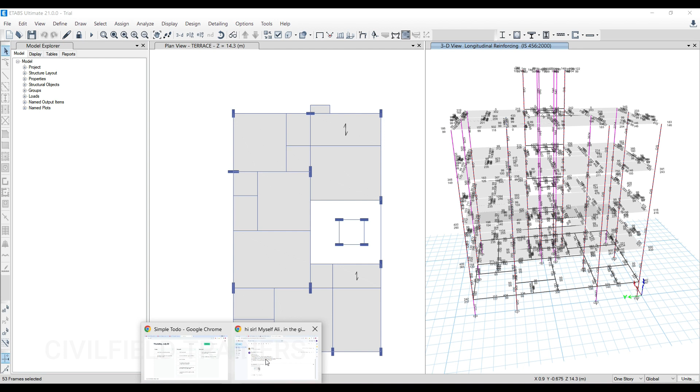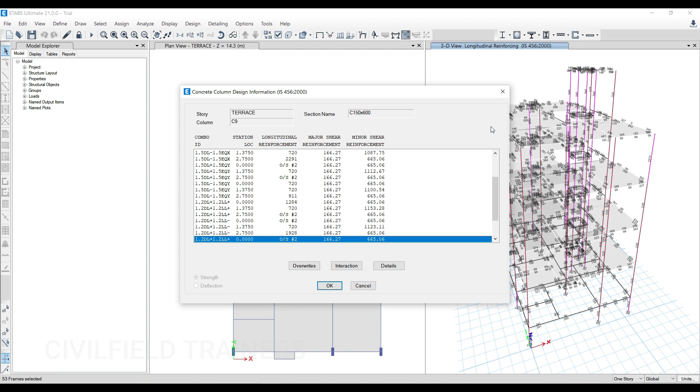We'll come to this part later, but let's come over here and see how we are going to solve this. The very first thing that you have to do anytime this kind of failure comes is to open this and see. So I'm seeing the topmost column, and you can see in the longitudinal reinforcement - see, in the shear part nothing is failing, in the minor shear nothing is failing, but in the longitudinal reinforcement you can see there are so many failures.

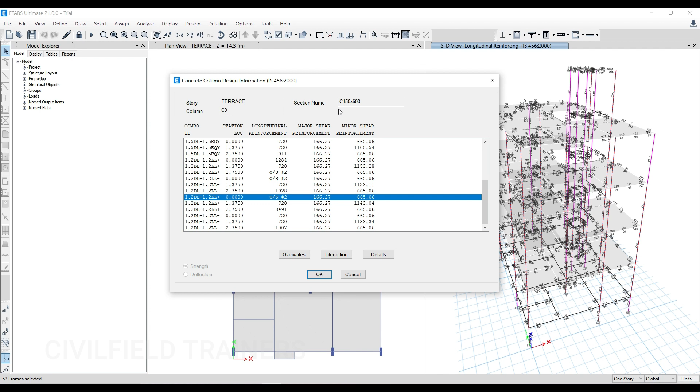Off the bat you can see two things. One, most of your failures are basically in earthquake conditions, that are failing a lot of stuff. And the second thing is the size of the column - it is only 150mm, it is 150mm thick and 600mm in length. So your question might be, sir, how can we just give a 150mm column, which is actually quite true.

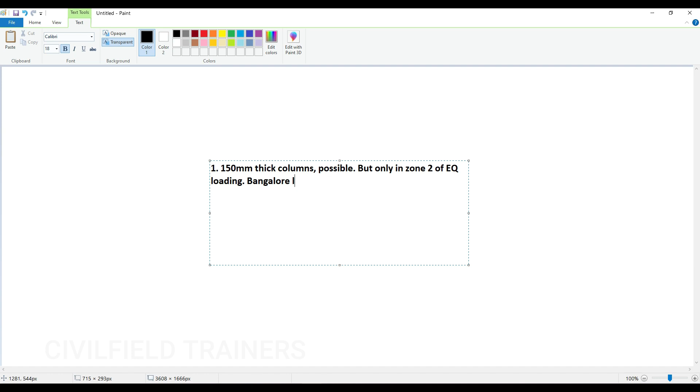So the very first thing that I'll do is unlock this model. Let us go to the paint for just a second. I'll just make a note so that even you can remember what we have covered so far. The very first thing is 150mm thick columns are possible, but only in zone 2 of earthquake loading - basically Bangalore like regions. If you go north, you cannot do this.

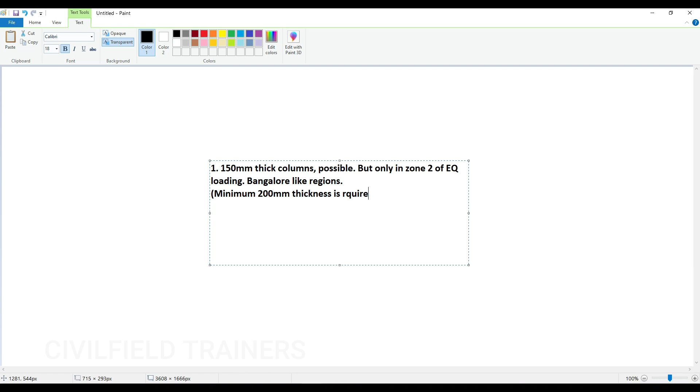Minimum 200mm thickness is always required. This is given to us by the code - if you open up IS 1893 you will get this. And this is the very first point that we have to discuss: 150mm thick columns are possible, but only in zone 2 of earthquake loading, where there is no earthquake basically. Bangalore like regions, minimum 200 thickness is required.

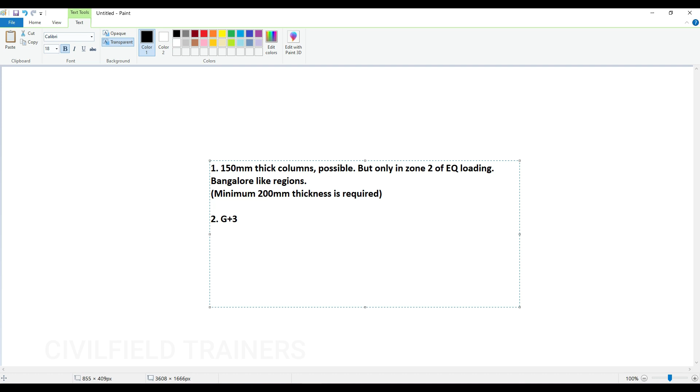The very first point. Second point is for G plus 2, G plus 3 projects - up to G plus 3 projects, no need of EQ loading. Why am I saying this? Because already Bangalore is in zone 2, and this building belongs to Bangalore basically. So it's already zone 2 and the height is just G plus 2 - I think G plus 2 or G plus 3 project it is. So there is no way of providing earthquake loading for such a small project. You're not going to get any kind of drastic changes because of EQ loading or wind load basically. So no lateral loads.

Okay, so let me just open this thing again.

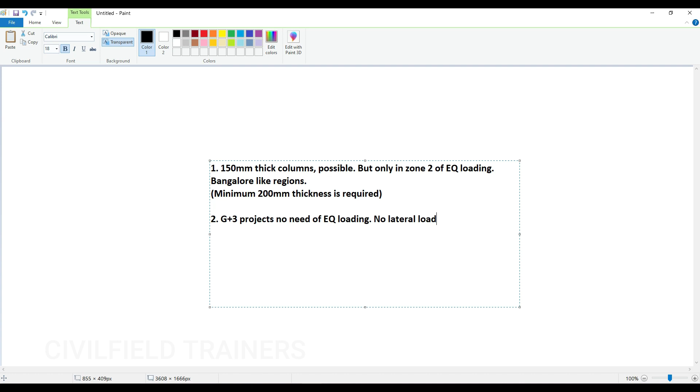We have to go to define, then load pattern. Let me check what we have done here. So we have got self weight, typical live load, roof live load, wall load, floor finish. We have EQX and EQY, but we don't need EQX and EQY, so let's just delete this load directly.

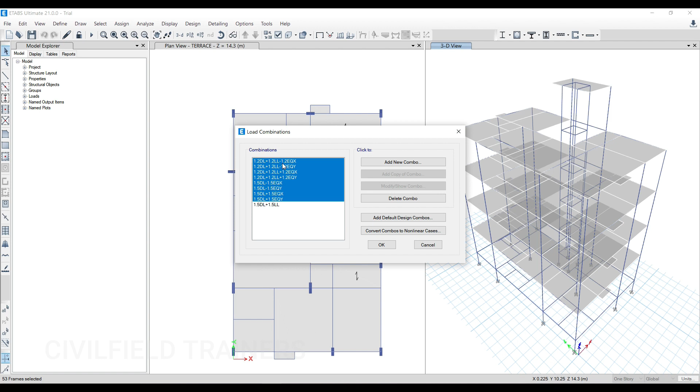Okay, I'll come to define and go to load combinations now, and let me see where is EQX and EQY. Okay, almost all of them have EQX and EQY, so let me just delete all these combos. Let me add a new combo here.

Let me make it a dead load plus live load combo, with self weight, typical live load, roof live load, wall load, and last but not least floor finish. Okay, 1 2 3 4 5.

So we create one combination like this, and let me check this one. You can see there's a mistake done here. It is 1.5, but floor finish has been applied 2 times - I think roof live load is missing here.

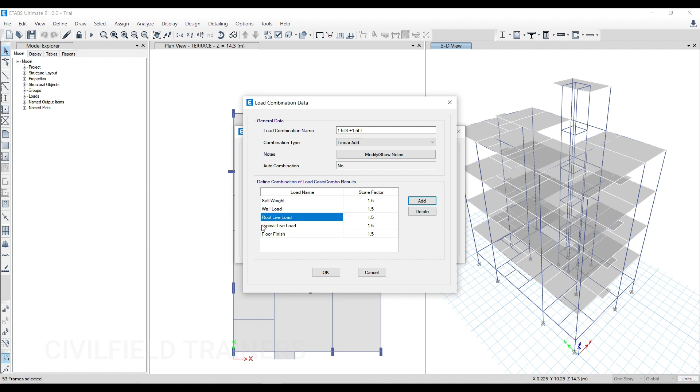Roof live load, okay, so you have to check this. All right, like this, so let me just open this up. G+3 project, no need of EQ loading. Third step would be: check your load pattern and your load combinations. It is very important, because we just got a mistake over there. So we have done this much.

Let us run the analysis again. We have to do this 4 to 5 times - an iteration process is required here. Only then can we tell if it is coming safe or not. Now because we have removed the EQ from the equation, a lot of the columns should be coming as safe right now.

Okay, let me check this. So I'll go here, verify members passed, and now half of them have become safe.

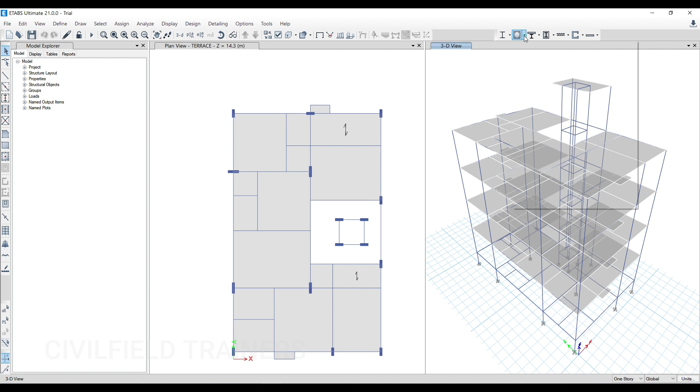One more thing I wanted to check: let me unlock the model for now. After unlocking the model, I'll go and click Control A - you can choose whichever window you want. Click Control A, go for this option, and click View/Revise Overwrites. See, right now the option is available - if I don't select anything, this option will not come to you. So Control A, select everything, then do View/Revise Overwrites.

Just mention this point also: the fourth step is select the complete model and go for View/Revise Overwrites. I think overwrites are a different thing. Overwrites, okay. So let me come back over here.

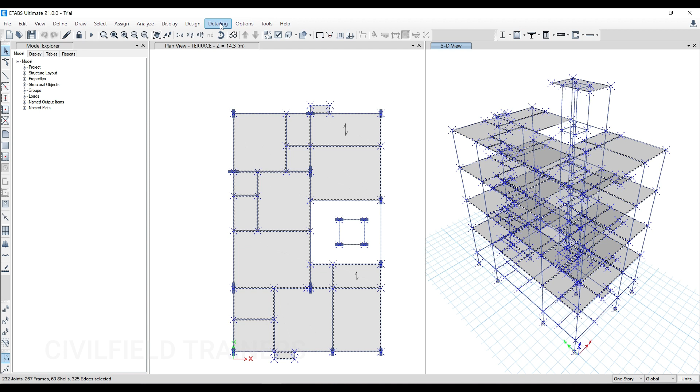So select the entire model first, Control A, then come over here. If you're not able to find this option, you can go for Design, Concrete Frame Design, View/Revise Overwrites, you will get it over here. Okay, select this option now. In this you can see current design, this one varies, it is there, let it be there.

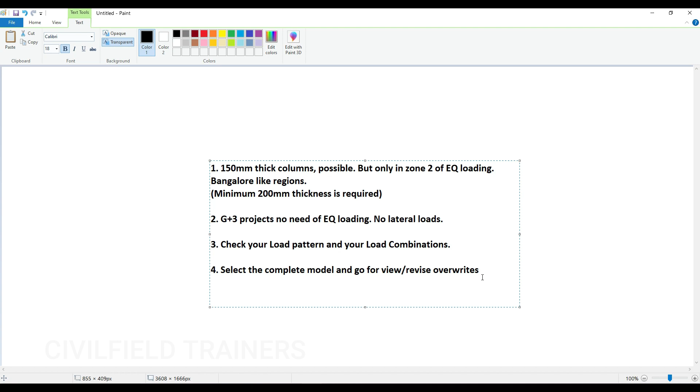Framing type is ductile, we have to change it to ordinary. Okay, framing type, you have to make it ordinary. Now click OK and let it be like this. So let me come over here - you have to make it ordinary framing type, because we're not applying any earthquake loading.

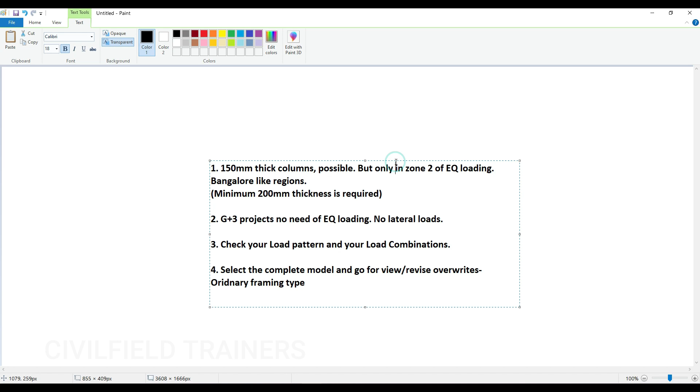So this is the fourth step that you're going to do: View/Revise Overwrites, you have changed the overwrites. Let me run the analysis again. Okay, still 25 members are failing.

So after doing that step, the next step I'm going to do is I'll unlock the model, and now what I'll do is start increasing the sizes. Now the client is asking you to give 150 mm thick columns on your site, because they hide very well in your brick - if you just come and check this video out, you'll understand. But if it is not possible for 150 mm thick, you have to go for 200 by default.

So what I'll do, I'll come over here, go for define, section properties, frame sections. So far I have got column, beam of this one, and column of this one. Let me just modify here and make it 200. All right, just make it 200. Let me just check modify/show rebar, what we have given here.

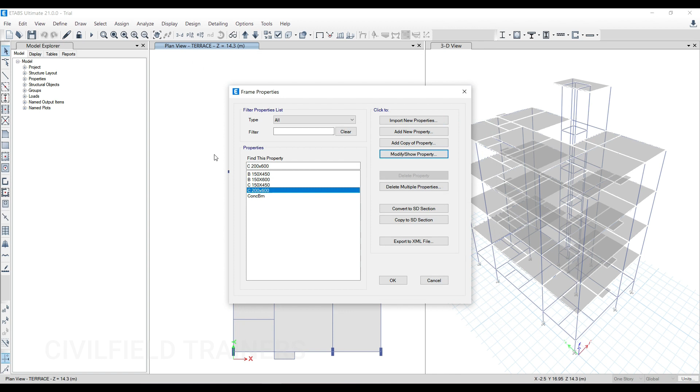Okay, as you can see, if I click on verify all members passed, only 2 concrete members are failing. What did I do? I just increased the thickness by 50-50, that's all.

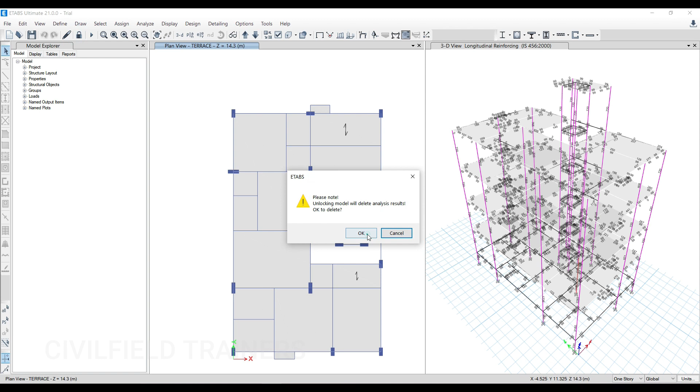Okay, but if you see here, these kinds of projections are not good. So what I'm going to do is unlock the model now, and change the orientations so that these columns hide along the walls. It is very important to have a building which is aesthetically pleasing.

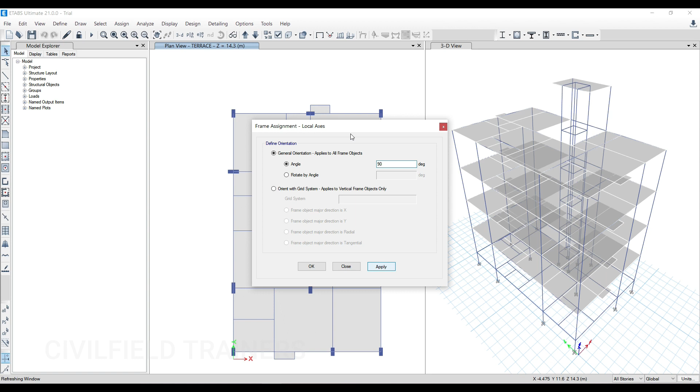So just select the column, go to assign, go to frame, you can go to local axis, and from here you can make it 90. Click on apply. So you can do that much, and I think I'll do the same thing here also.

Local axis, it is 90 already, so I'll make it 0 here. I'll apply it. Or if you want to keep it like this, also no issue. But if you want to hide it along the wall, you can hide it like this. Now click on apply and click on close.

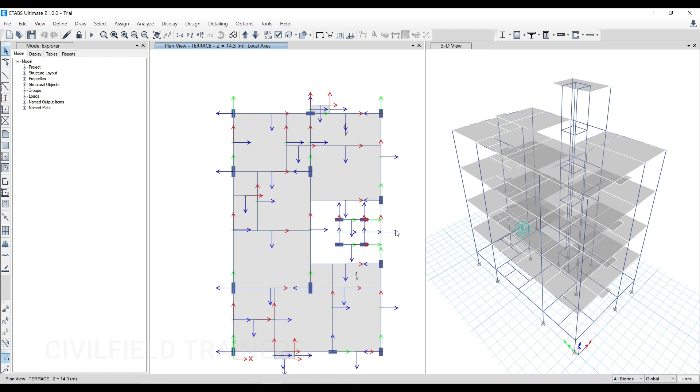Okay, let me just do this, and let me rerun the analysis. Let me see what we get this time.

Okay, so if I come over here, verify all members passed, we can see still 2 members are failing. But which are those 2 members? So I'll just show you how to select them. Click on verify all members passed, for the 2 concrete members, just click on yes, you'll select them. Then right click and click on show selected objects only.

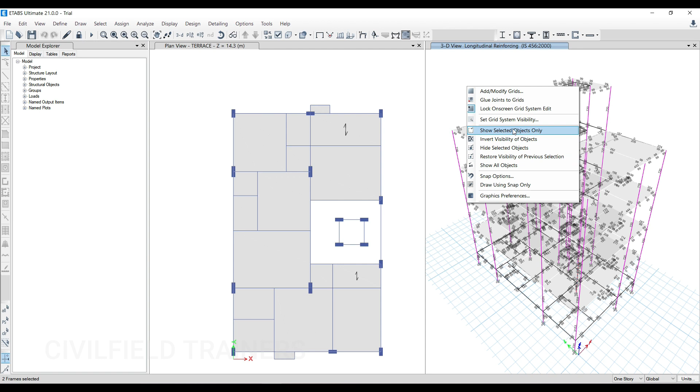Alright, let me repeat the steps one more time. Come over here, click on verify all members passed. Do you want to select them? Click on yes. Then right click and then click on show selected objects only. If you do this much, you'll be able to see which ones are failing.

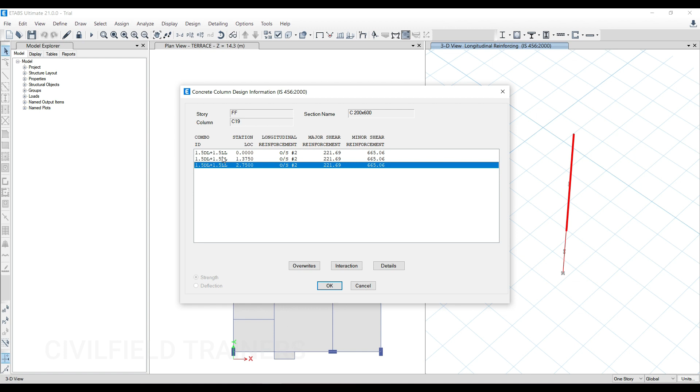So let me just right click over here, and you can see these are failing in our factored load case, and they are failing in longitudinal reinforcement.

Not only that, let me just go to select object type, and let me go to columns and select the columns only. Right click again, I'll do show selected objects only. I have selected only columns, so all my columns will appear over here, and you can see the values are quite small.

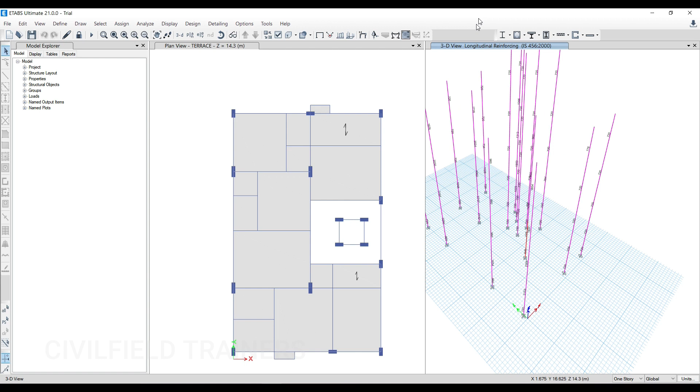So let me just go to options, graphic preferences. Let me just increase the size a bit, and click on OK. Alright, so the size has increased.

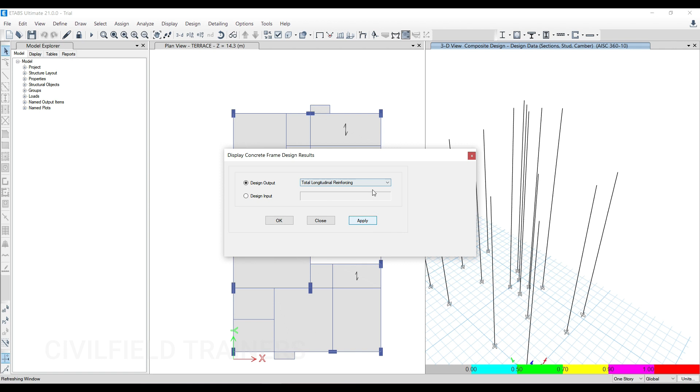Let me come over here. Sorry, not that option. Display design info, total rebar percentage. Click on apply and click on OK.

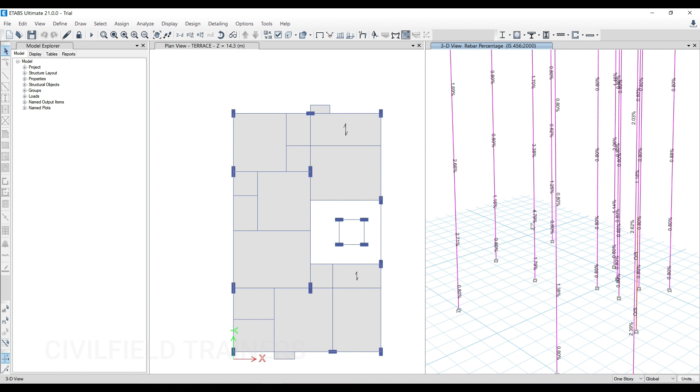Alright, so if you see here, how much are we getting? 0.801, 0.81, 0.81, 0.8. Okay, 0.8 we are getting. So we have to check every single column. See here, we are getting 4% here, 4.79%, 3.38%.

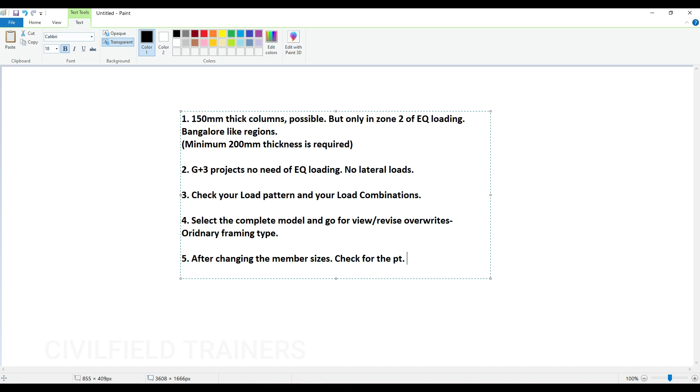One more point that I want to add here is, fifth point is after changing the member sizes, check for the PT percentage. Basically if you check for the PT, for columns it should be less than 4% according to the code, but as per site practice 2.7% is the max that I want to go to. I don't want to go beyond 2.7% because it will become a bit difficult for you to do your concreting if you go beyond that.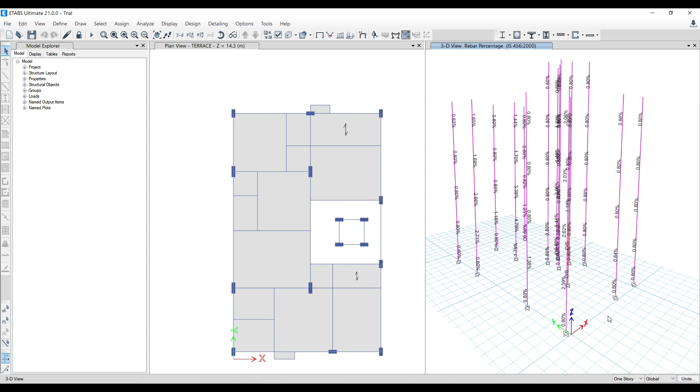But here if you see we're getting 4.79, which is actually not accurate based on the code, and if you see it is this column, 3.3 and all we are getting. Even here 2.71 is fine, no problem with that. So if you see here, these columns are very heavy in the reinforcement, this one.

So what I'll do is open up my AutoCAD plan now and check what is there, where else can I put the columns. I think the student has done some reassigning of columns by himself, and if you see here, we can do this - we can put columns like this. The columns will easily hide in the walls, so there is no problem. They are not going to be coming in the living room or anything.

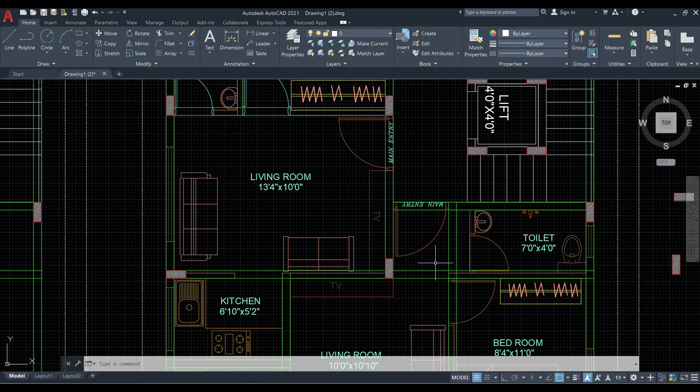Okay, so we can hide the columns like this. So I'll minimize this part, and what I'll do is I'll put one more column here and one more column over here. Why? So that this 4.7% and everything that I'm getting becomes a little bit less.

As per vastu, we cannot have an odd number of columns. We should always have an even number of columns. This is what we follow here in India. So 1, 2, 3, 4, 5, 6, 7, 8, 9, 10, 11, 12, 13, 14, 15, 16 are there. I cannot make 17 columns, so I am increasing one more column based on vastu, so it's okay, no problem. Your client also will not say anything generally.

Alright, so what I'll do is unlock the model now. My reasoning is I have to decrease the percentage of my column reinforcement. So I'll go for drawing the columns now. I'll select column 450, I think that will be fine, and I want to hide this along the walls.

So if you check this, I can hide in this direction also. I cannot hide in this direction because my washroom door will come, so I can hide in this direction my column. Let me just minimize this and go for the angle, make it 90. I'll drop one column over here and another column over here, and you have to check your drawing because your opening is over here and one more opening is over there, so this column will not obstruct the opening as such.

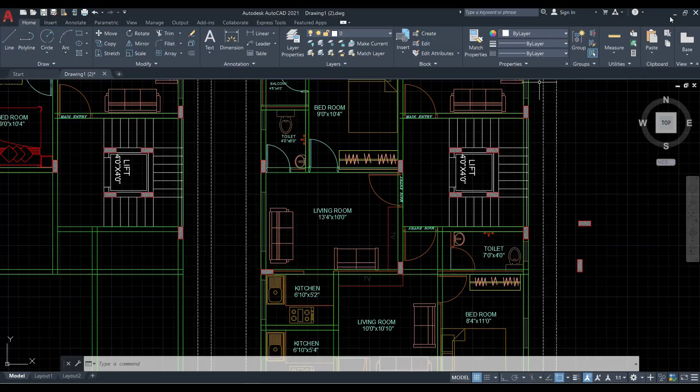You have to move it a little, but that's not an issue. It will hardly move 30-40 centimeters from here and here. That's not a problem. So after doing this much, let me just rerun the analysis.

Okay, the columns are still failing. Maybe if I change their orientation they might not fail. Let me just click on this one, and what I'll do is go for the all stories option. I'll select this whole thing.

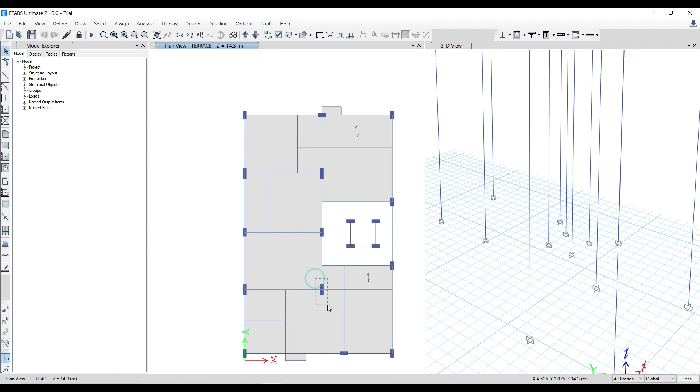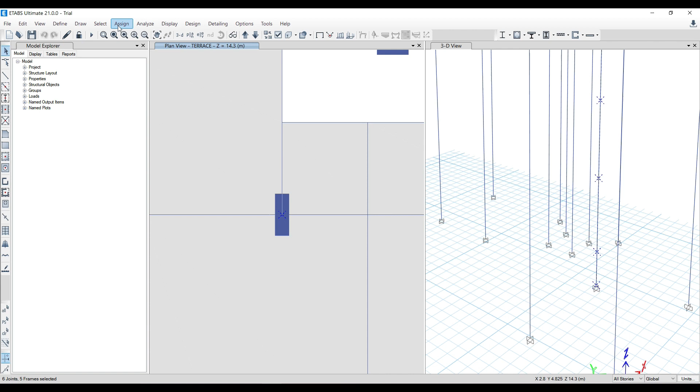What is this? Just a second. Let me just reassign this first. Assign frame, local axis is 0, apply, and okay. Alright, so let me just unlock the model.

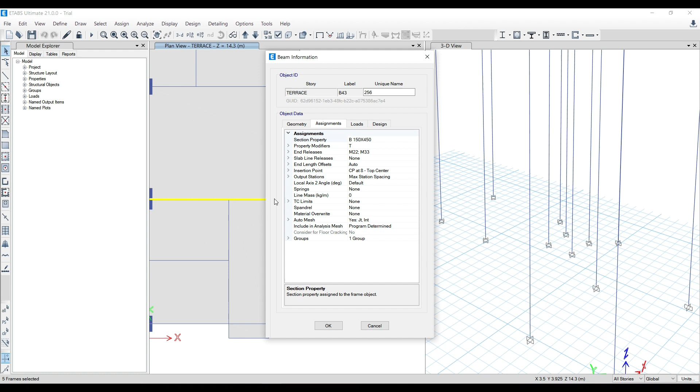So let me just delete this all stories. Let me delete this and redraw them in all the floors, or I can just change them also, not an issue. But check this out - the columns were not placed in each and every floor. That's why it was failing. Alright, so I have to select this.

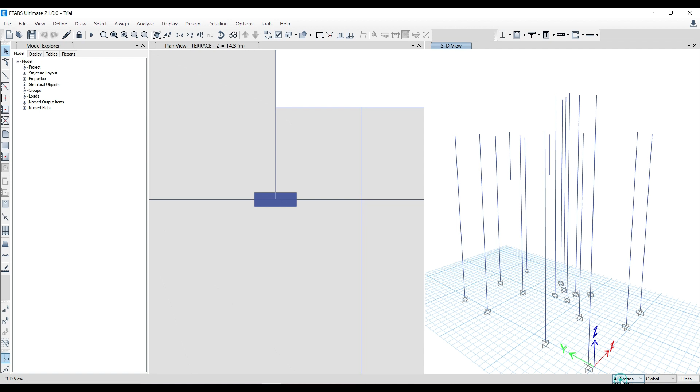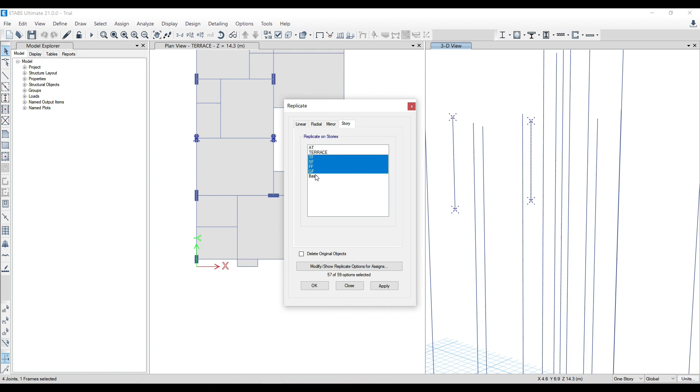Go for one story, select this option. Just do Control Z, select this column, select this column. Okay, replicate this - edit, replicate for stories - and since this is the terrace floor, it needs to go all the way down until the base. Just click on apply, then click on OK.

You have to repeat the step for this particular column again. Edit, replicate, story, all the way down, apply, and now click on OK. Alright, now let me run the analysis and see what happens.

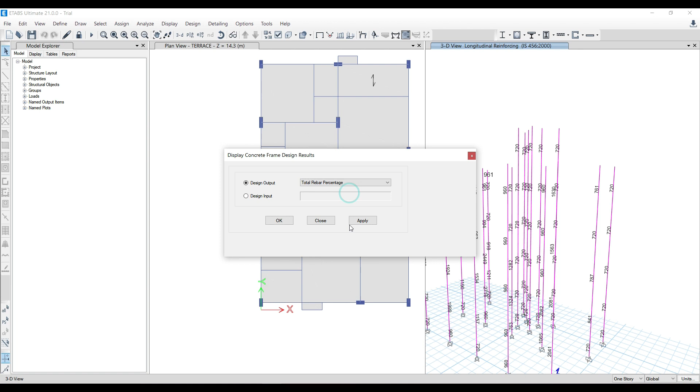So if I click on this and click on verify, all members have passed. If I want to check the percentage, I have to click on display design info, then click on total rebar percentage, click on apply, and click on OK. I have to just zoom in and check those columns now, and you can see they have drastically reduced.

Now my question is, do I need such a big column here, a 600 column, or can I decrease the size of the column and see what happens? Yes, you can do that completely, no problem in that.

Here it's 2.26, 2.40, so the value is still there, so I wouldn't decrease the size for this particular column. But this column, if you're not able to understand, just go for the all stories option, select this particular column. The column will get highlighted over here, then you can check it.

So 1.7, 3.8, 3.8. So what I'll do is select this column, let me unlock the model. Now we are trying to make the design economic, because you have increased the size of a column, you have added 2 extra columns.

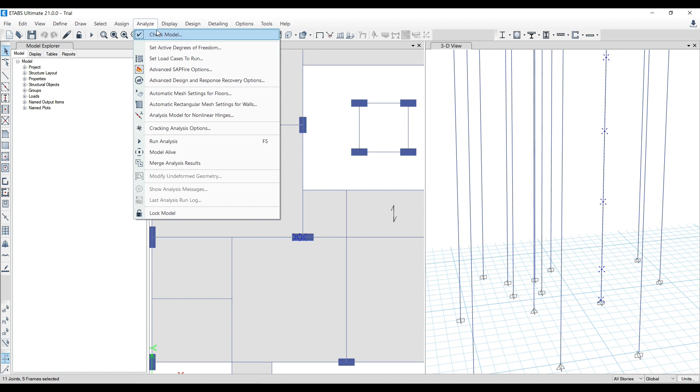Let me just decrease the dimensions of this column and see what kind of results I get. I'll go for assign frame section property, and select column 200 by 450, apply.

Not just that, I have to change this also because they are not sitting at the column point here, they should sit over here. I have to delete them and redo them, but they already have applied loads, so I'm not doing that right now, but I would ask you to do it.

All you have to do is select this, go for the reshape tool option, select this and change the direction from there to here. Just drag and drop it over here, and make sure to check if anywhere anything is overlapping or not.

Everywhere else everything is fine except this point where the beam is not sitting on the column, so you have decreased the size for that. Let me just rerun the analysis.

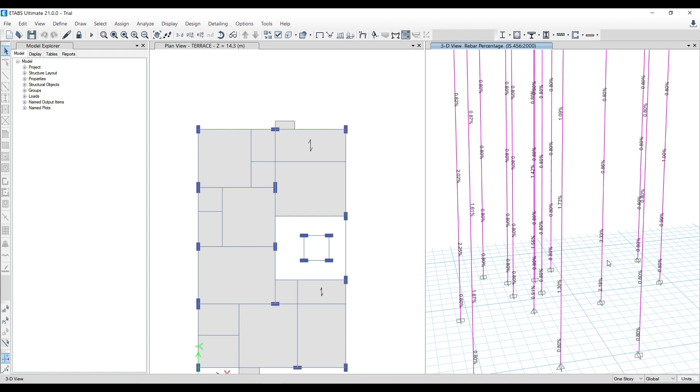Come over here, display design info, total rebar percentage, apply, click on OK. Now I think the value is increased, it has become 3.33.

Let me go for all stories, select this one. Yeah, so I have to increase the size for it. This is the process that you have to follow every time you want to decrease some column size and see what kind of reinforcements you are getting for it.

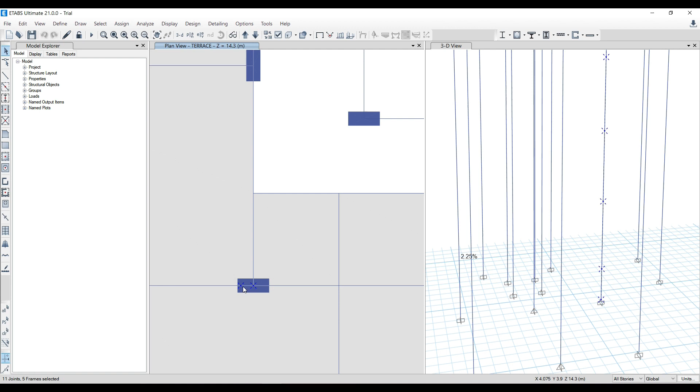So I'll go to assign, frame, section properties, and reassign the old property to it. Click on apply and click on OK.

Alright, if you do like this, you'll be able to make your model safe. This is the steps that you have to follow basically. First you have to see the type of columns that you have given.

150 mm thick columns work in Bangalore, but in this given project it was not working out, so we went with the code and gave 200 mm thickness as required. That's what we went with. We didn't increase the size too much.

Then again, this 150 mm thick is only possible in which zones? In earthquake zones like zone 2, basically if you're not applying earthquake load, you can do it. If no earthquake, if no lateral loads are there, you can go with 150 mm thick columns.

Again, just for G+2 or G+3, not more than that. Don't go for G+5, G+6 projects with 150 mm thick columns, it will not work out.

Then what did we do? We checked the load patterns, then the load combinations, and then select the complete model, view/revise overwrites we have to check. Then we have to check that PT should be less than 2.7, less than or equal to 2.7 should be there.

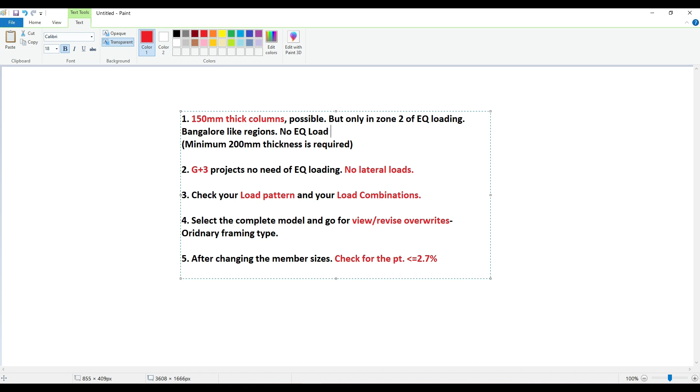No earthquake load, no wind load, small structures. So this is basically the 5 steps. If you follow them, you'll be able to make any project of yours safe.